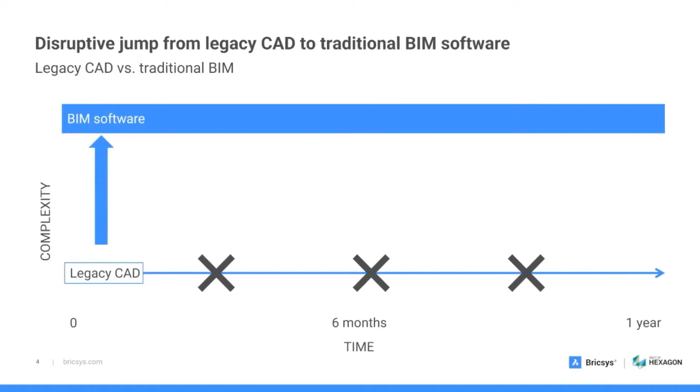Now, at Bricsys, we have quite a different approach to BIM compared to traditional BIM vendors. Let me explain that a bit more. Moving from CAD to a traditional BIM software is quite a disruptive process. BIM is a very different system than CAD, so it requires a full 100% conversion. All CAD licenses will have to be abandoned, but also all CAD data like template files and so on, built up by the users over many years, will all be lost. So they all have to be recreated manually in the BIM environment.

And since these traditional BIM software are very different from 2D CAD, it often takes 6 to 12 months to truly master it. So in the meantime, they lose productivity in the first 6 months while everyone is trying to make the transition.

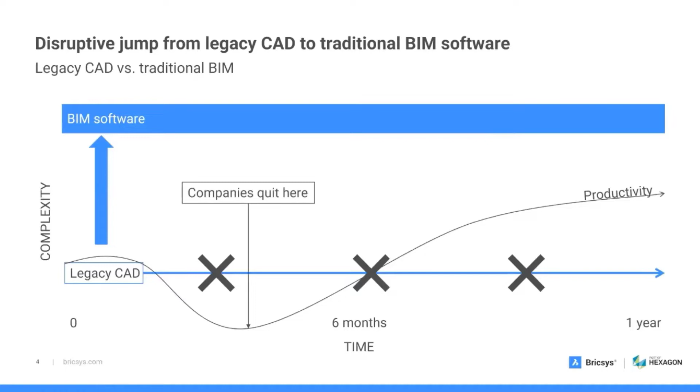And we often see that companies then quit in an early stage, but then all investment costs are lost, and then they fall back to CAD. And that's quite a shame, because as we will show later on in our demo together with Vrex, BIM workflows can really help to detect problems early in the design phase and avoid problems later on during the construction phase.

But then we have to offer those companies an easier transition to BIM so that they can do it at their own pace and without losing productivity during this transition. And that's what we do with BricsCAD. So in our BricsCAD portfolio, 2D, 3D, and BIM are in the same CAD system and can be used together. So you can reuse all your CAD data and avoid this drop in productivity.

And companies can then gradually make the transition from 2D to 3D and BIM and more advanced workflows based on that, so at their own pace. So you get more productivity step by step without having this disruption to your productivity.

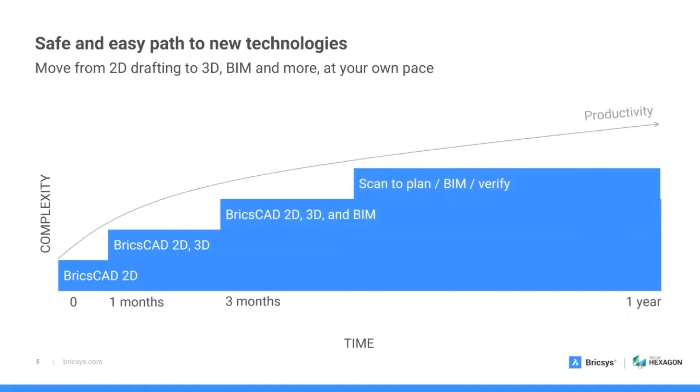Now, a full overview of what BricsCAD BIM is capable of would, of course, take us way too far. So I would like to focus on how we approach design, coordination, and openBIM. Now, openBIM and vendor-neutral collaboration have been at the center of the BricsCAD philosophy from the very beginning. So Bricsys, as you might know, is a founding member of ODA, which is the Open Design Alliance, which has enabled the use of this industry standard DWG file format across different authoring tools.

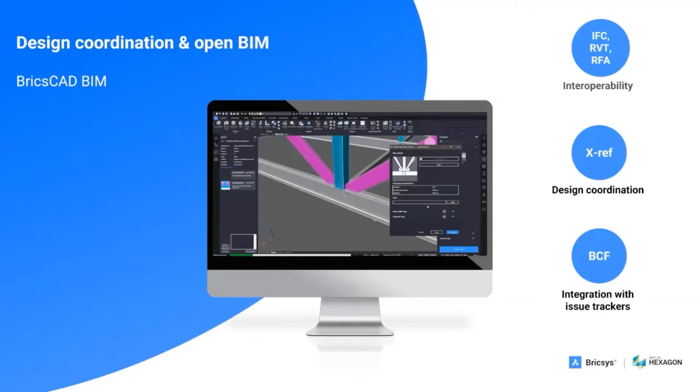But on top of that, we also offer IFC import export, we offer RVT import, RFA import, we also natively support BCF. And we have implemented openBIM quite differently than many other tools. So here are openBIM design principles that we've used while implementing openBIM. So first of all, we align our design workflow to the openBIM principles from the very start. So for us, IFC is more than just this export that you do at the end. Our internal data and classification structure is fully aligned to the IFC structure from the very beginning when you start modeling in BricsCAD BIM.

Some still see IFC as this static format for archiving or referencing projects, but we see IFC really as a building model exchange standard. So you should be able to work with IFC models the way you work with natively created models. We automate as much as possible, so openBIM should not be a hassle. And with our AI machine learning tools, you can automatically classify your building elements according to the IFC classification structure. And finally, we offer natively this BCF support. So we have a built-in BCF panel.

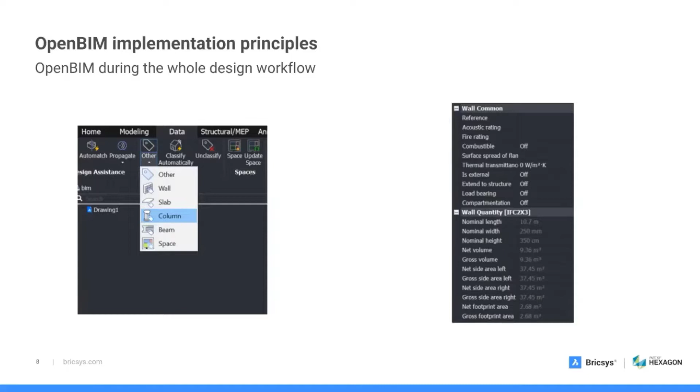So our whole internal classification is fully based on the IFC classification. So when classifying an entity while modeling, it is already according to the IFC specification, and also all of the properties of IFC and the quantities are already there available during the whole design process. So you don't need to worry about mapping or anything. So what you see in BricsCAD is what you get in IFC.

So again, IFC is still often used just as a reference or for coordination, like an architecture model that is used as a reference for an MEP model or for clash detection and so on. But we want to make it possible to use IFC for design transfer as well. And we make that possible with our IFC import. So when importing an IFC model, all elements are imported as native BricsCAD BIM entities, which has, of course, many advantages. So you can just continue designing, adding data, using all the automation tools that are available in BricsCAD BIM, generate construction documentation, and so on.

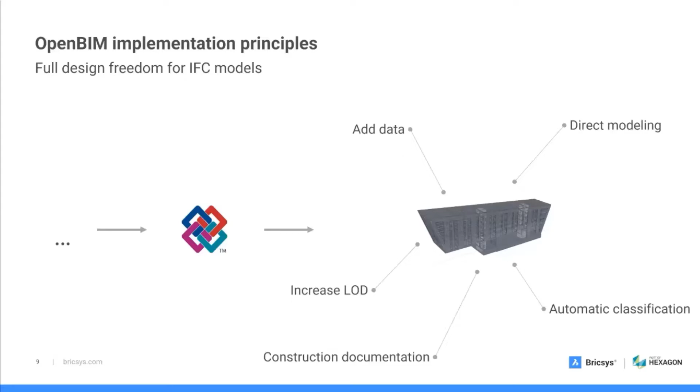BCF, as most of you know, is the openBIM format for exchanging issues and communicating with other project team members. Now we offer BCF support built in, so we have a BCF panel inside BricsCAD BIM, in which you can read BCF files, but also directly connect with the API to cloud BCF services like BIMsync, BIMtrack, BIMcollab, without needing to install any plugins for these specific platforms.

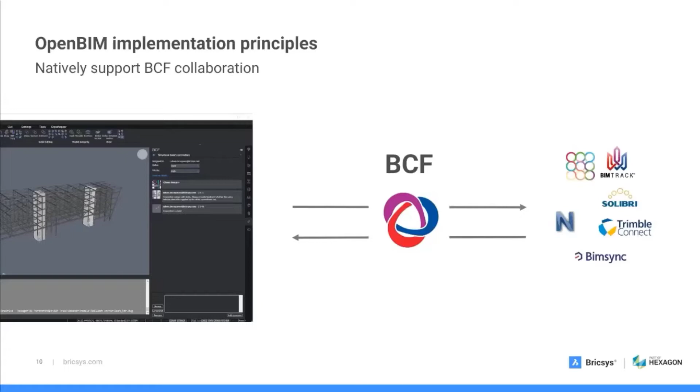Now, our focus on openBIM is paying off, and today you will clearly see that in the demo later on, where we show the integration with Vrex. The whole workflow is fully based on openBIM, so we use IFC and BCF standards to integrate with the Vrex Virtual Reality platform. So the model that was created in BricsCAD BIM just gets exported easily to IFC and imported

in Vrex. And then in Vrex, you can create BCF issues and either transfer them to BricsCAD as a BCF file and open them in the BCF panel, or you can use the BCF API and connect to one of the BCF services like BIMtrack, BIMcollab, and so on. So here you really see that investing in this openBIM support pays off to easily integrate with a tool

like Vrex. Okay, I will now pass over to Rune and Chris from Vrex.

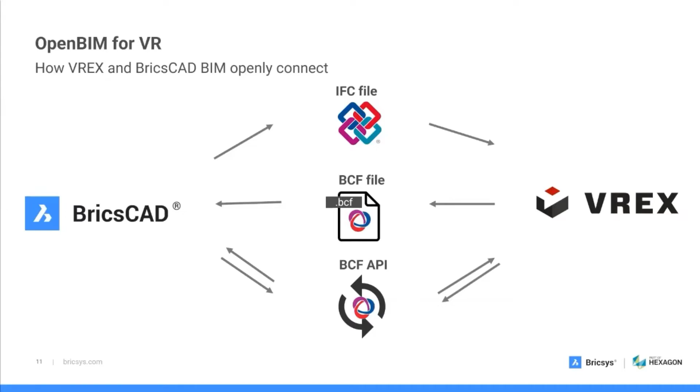Before we head over to VR, we want to give you a bit of background information about Vrex. Vrex is used throughout the world and is supported in multiple languages. Our headquarters is in Norway, and we have partners throughout the world to support our customers. Our customers range from building owners, designers, consulting teams, as well as contractors. Vrex is used on projects of all sizes and all types. This includes commercial, government, and industrial sectors of the construction industry.

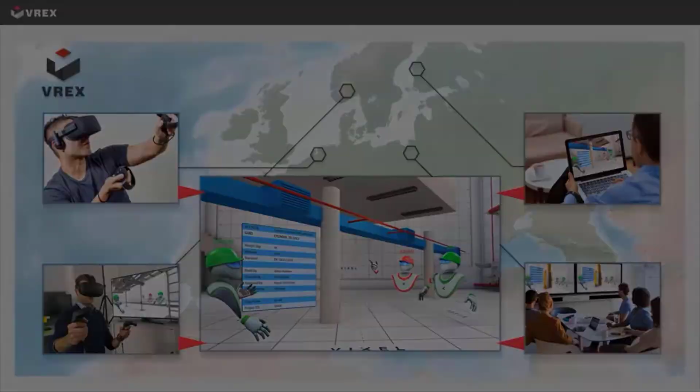Our core mission at Vrex is to allow all project stakeholders to step into the 3D model. Everyone can experience BIM together, live, and at the same time. They can do this either in VR or by watching on our desktop viewer on their computers. Vrex enables you to resolve complex issues as a team and prevent costly rework downstream. Using the IFC and BCF, or BIM Collaboration Format, buildingSMART and openBIM have enabled Vrex and BricsCAD to seamlessly exchange models and issues together.

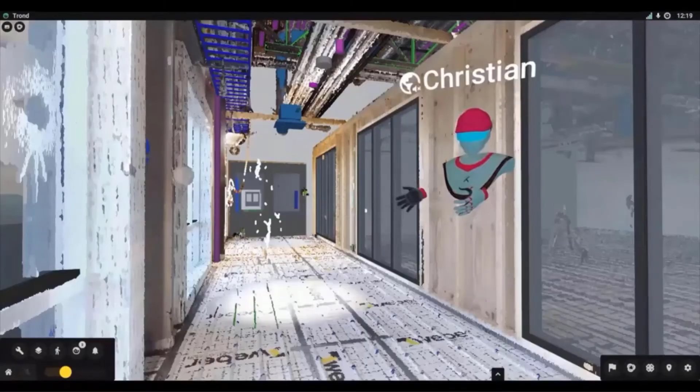In addition to BIM, laser scanning and reviewing point clouds for as-built conditions is becoming common practice on projects. Vrex allows stakeholders that can't go out to the job site to overlay and visualize point cloud scans together with BIM in a life-size environment. Alright, so now Rune and I are going to put on our VR headsets and do a live demonstration of Vrex. We're going to be reviewing the project at the same time, but Rune is going to be in Norway and I am in the United States.

All right, so Rune, we're both here in VR. Would you mind coming over onto this side? I want to show you something here related to this cantilever. This side of the building is cantilevering over with no underlying support, so I want to take a look at the structural for this. Yep, exactly, that spot right there. So I'm going to turn off the architectural.

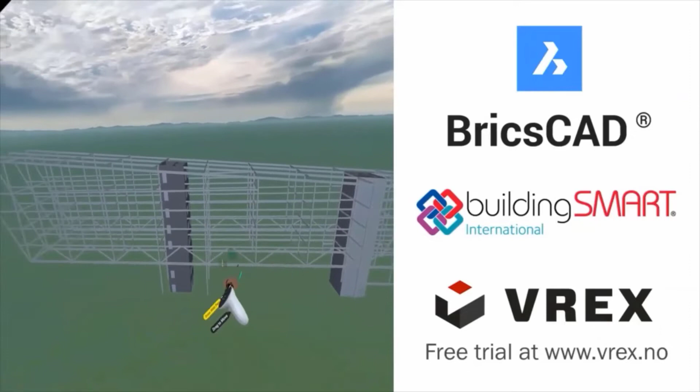And now we're looking at the structural, and I can see that there's a truss system here that the engineer has done. Let me go to red lines. We need to talk with the engineer and then the construction team about how they're going to fabricate and splice those trusses. I feel like we're going to need to do construction in this direction here, so that way we have a lot of the back span structural steel in place.

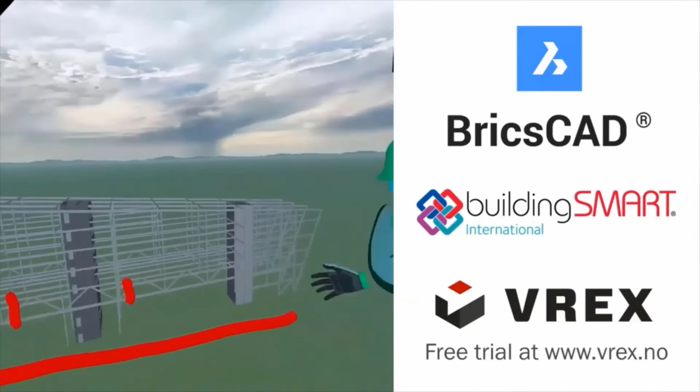And then we need to figure out where the trusses are going to be spliced, and where we're going to have our cranes. We'll need to talk about what sort of space there is on site for crawler cranes versus tower cranes. Then we'll need to evaluate the pick for the cranes, and see if we need two cranes to lift the truss pieces or not. And then look at how that core is going to be done in the middle there.

So let me take a picture. And then I'll schedule a meeting with the construction team so we can take a look at this and talk about it a little further. Now let's just clear out the red lines. Turn the model back on. I'm going to go into one-to-one mode here, or full life-size mode.

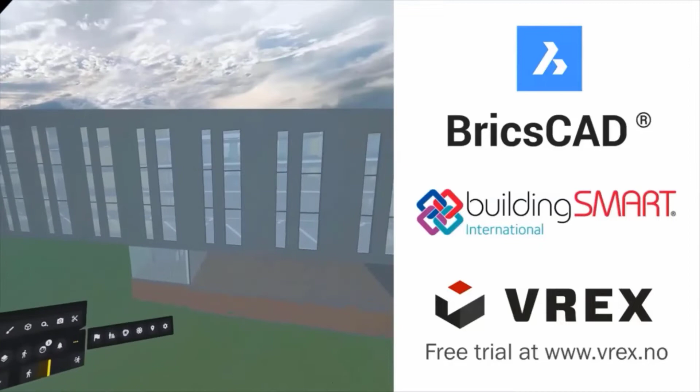Yep, I see you there.

All right, so now what I'm going to do is explain building sections using clipping. What's great about this is if I just click on a surface here on the building, and then I'm going to navigate forward so we can get a little bit closer. Essentially, if I hold down the trigger and move this clipping plane, I basically have a 3D building section of my project.

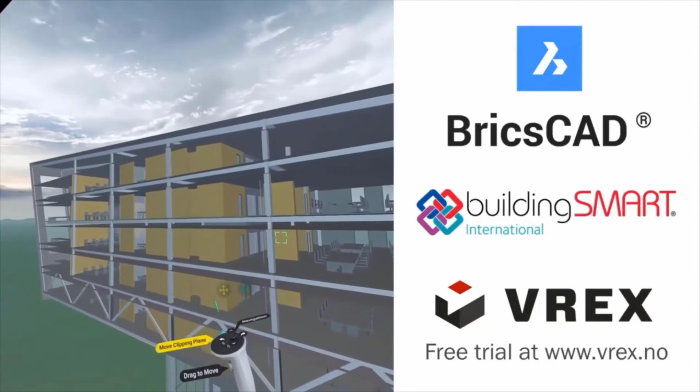You'll see on architectural drawings oftentimes building sections cut at different locations to try to give you a map of the interior of the building. Here in VR, this is just accentuated to another level. I can really see how each of the building systems work from floor to floor, especially if I had the MEP in here and looking at MEP shafts and where things transfer from floor to floor.

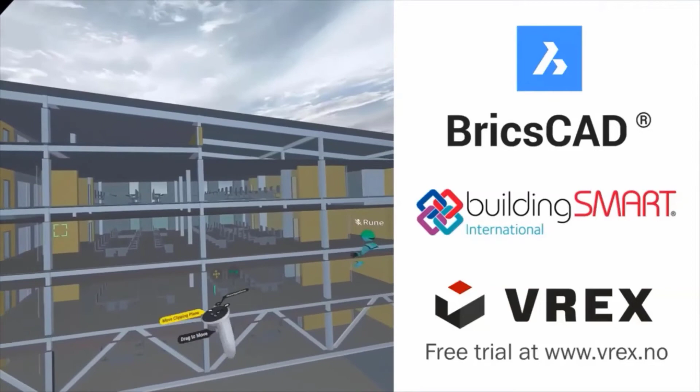I can see the consistency and layout from one area to another. I can see how the structural fits in the ceiling space. So really it just takes building sections to another level. I'm going to go ahead and remove the clipping plane.

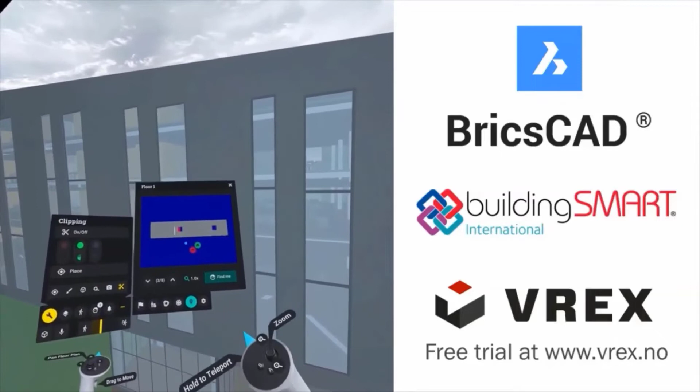And then what we can also do is go to floor plans here. This is another way for us to navigate. You can see where Rune and I are with our icons in the site plan, and we can just go floor to floor. Let's say here on floor number 3, I'll just click us into the building.

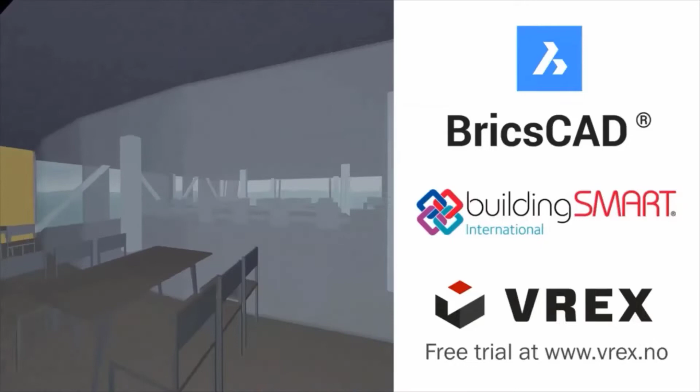Okay, so now we're teleported onto the 3rd floor, and we're life size. Essentially I can get a full feel and experience the model, and I can actually just walk over here. First thing I want to look at is how this structural is lined up with the architectural space. This feels a bit tight to me, and from a headroom clearance and safety point of view, I just want to make sure the architect and the owner are good with this.

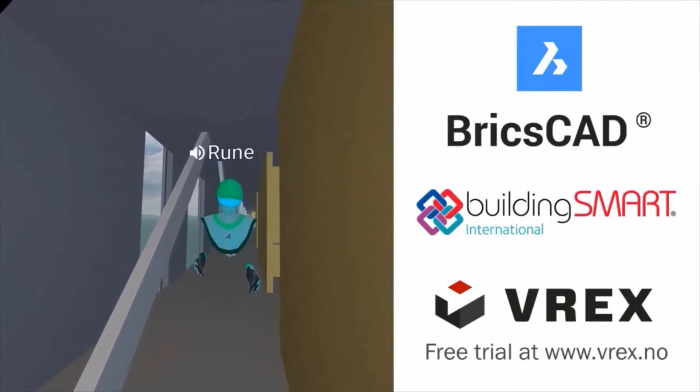I'm going to go ahead and walk through here. So Rune, does this look a bit tight right here? Do I look tight in this space when I'm walking through it? Yeah, it looks like you're walking through a slightly narrow door. Okay. Would you mind taking a measurement of that real quick? And then let's just...

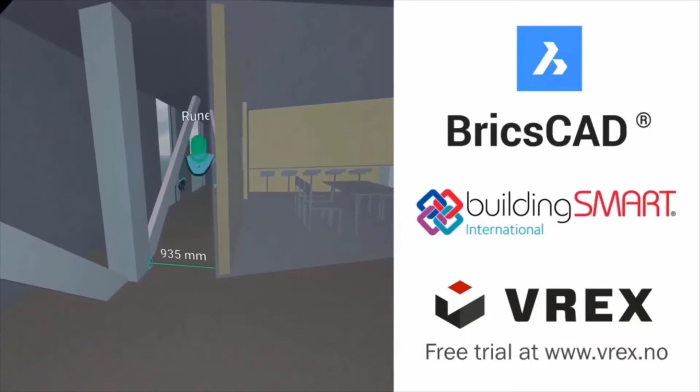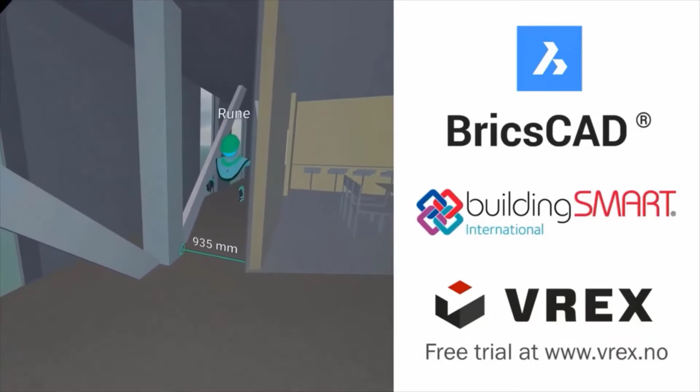Okay, so it's a little bit under a meter there from the clear face on the wall. I just want to talk with the owner and the architect. We'll get on a session with them and review this, and maybe we'll make an issue out of this later to verify.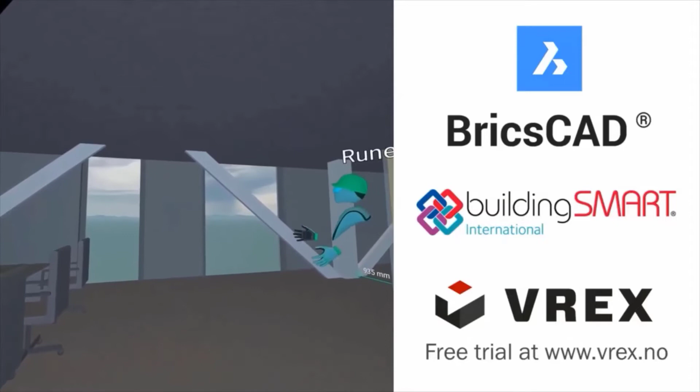This is a really good example on this level here. Just walking over to the middle of the space so I can get a feel for it. This level is a bit unique because we've got these truss web members or bracing members. I'm looking at how this affects, yeah, exactly where you were pointing there, how that impacts the visibility out the windows.

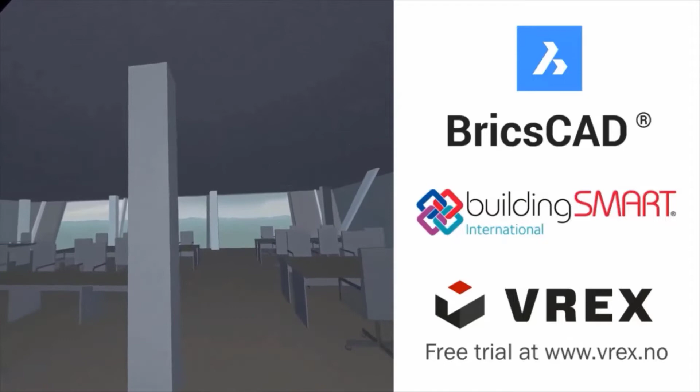I'm also looking at the column placement here relative to the window panels, and making sure that's all nice and symmetrical between the window manufacturer and the structural, so that aesthetically it looks good. So it'll probably be good to bring the architect and the engineer into this space and make sure that everything from a visibility point of view and safety protocol is all good.

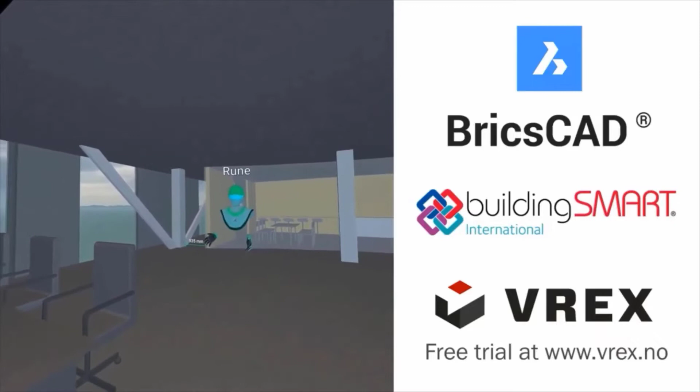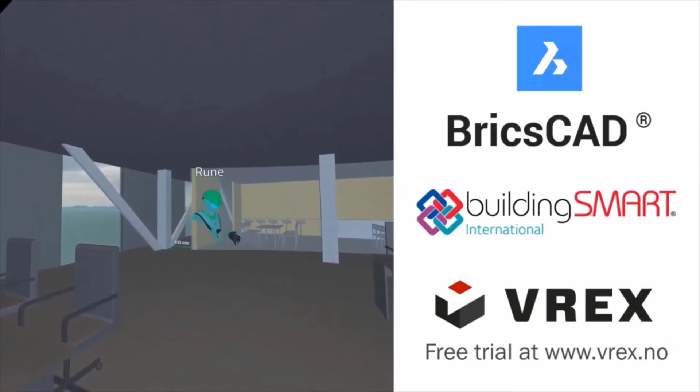You said you had some issues down in the basement related to MEP that you wanted to show me. Do you mind taking us down there? Yeah, I'll open that up. Yeah, so I want to go over a couple of issues down here. Okay. One of them is the water pipes. Looks like they're trying to turn to avoid the ventilation, but they're turning a bit too early. So I want to make a note of that and bring that back to the modelers.

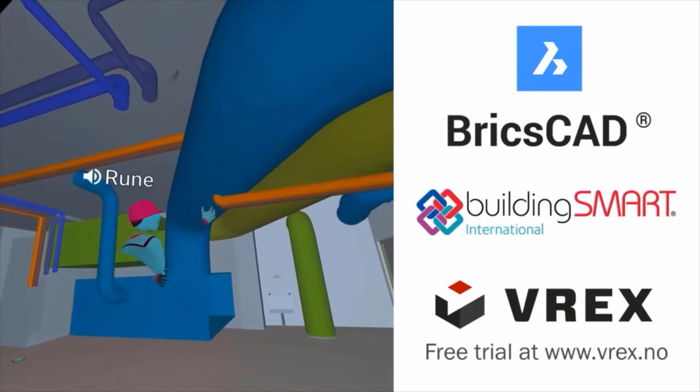So if you instead go over like this and go up there. Oh yeah, I can see the clear clash. Fine. Yep, okay. So I'll just take a picture of that.

The second issue I want to look at is the ventilation in front of the door. I know this room will double as a storage room for maintenance, and there's some big equipment going in here. It looks like it's going to be a bit tight getting past that door.

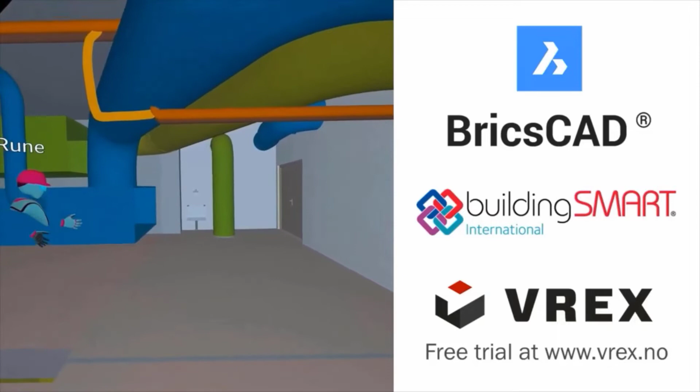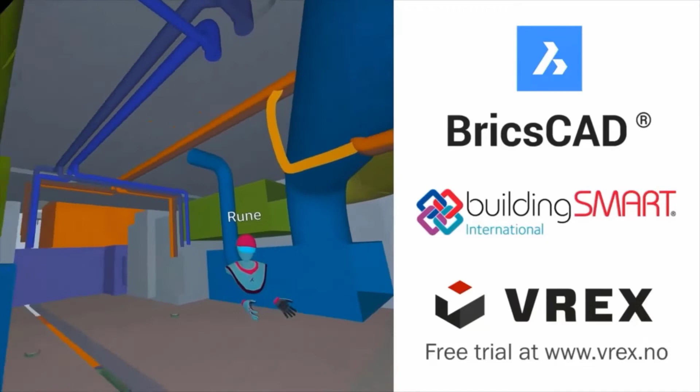The dimensions really help us quickly see that there's a potential access issue there. When we're down here like this, you can see this, of course, but looking at the BIM model on your computer screen, you can have soft clash areas and reservations around equipment.

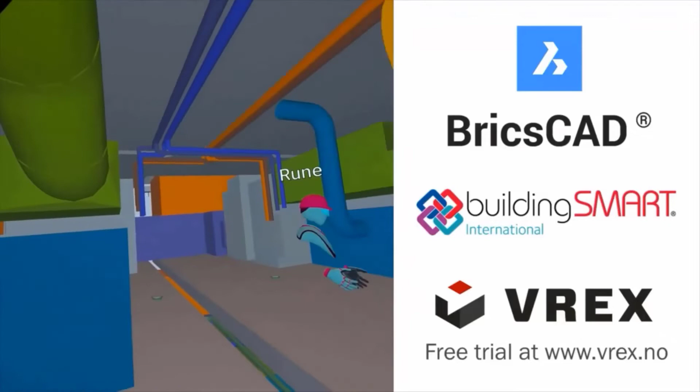Acting like I'm actually the maintenance person, putting in all the equipment and being able to feel it life size with everything in here, I can see all sorts of access issues, especially from a maintenance point of view. Once facilities actually start operating, this is just really powerful.

So I'll just make a red line of this, suggesting to move this slightly back. Make a picture of that.

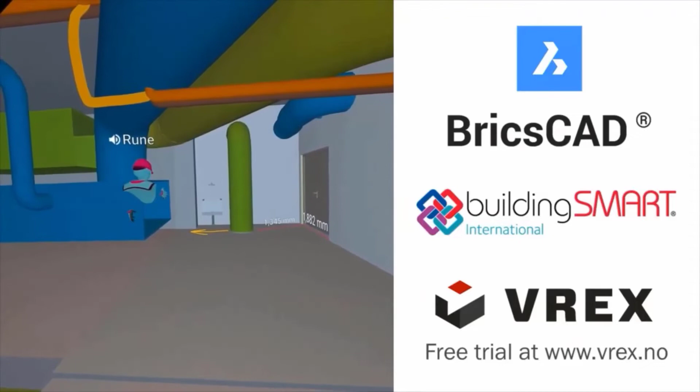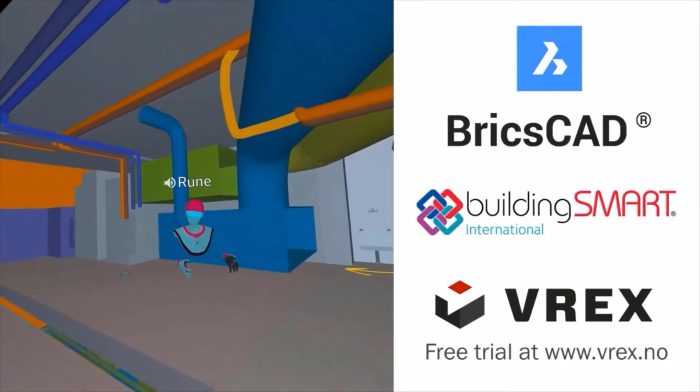I think that gives a pretty good overview of what Vrex and Virtual Reality does, allowing us and multiple project stakeholders to collaborate at the same time. You're in Norway, I'm in the US, and right now we're live here in what is as close to being the real building as possible. It's pretty amazing.

Now we're going to show you a live workflow between both BricsCAD and Vrex using openBIM. Let's dive in and see how this workflow looks.

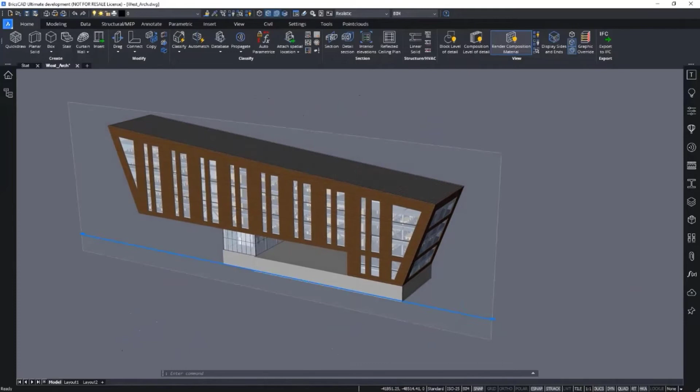We start in BricsCAD BIM. Here we have our office building. There are two models in here, the architectural model and the structural model, added as an XREF.

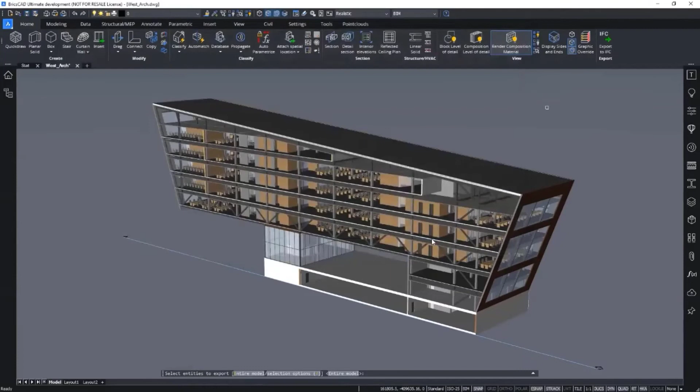Okay, we export to IFC, and in this case we will take IFC 2x3. We save, and then we go to Vrex.

The first thing you do is go to the Vrex admin website, then choose to upload your models. Then you add the files that you exported from BricsCAD. Once uploaded, they are processed and automatically available for a virtual reality meeting.

Then you go over to the virtual reality meeting application. You open that up, search for your project, and open that project. You type your name, set your audio settings, and then enter into VR.

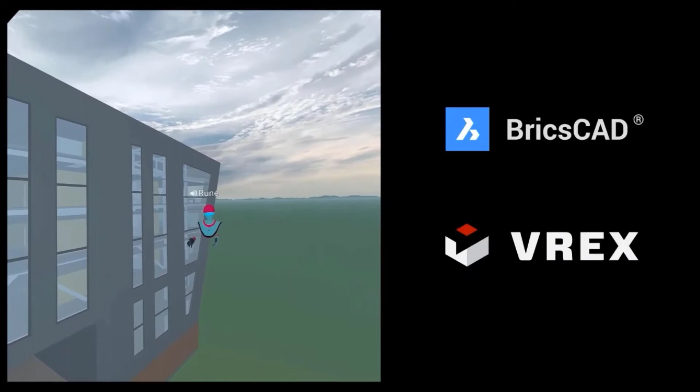Here you see me and Chris decided to meet inside a model. We will go to an area where we think there are some problems in the model. So we are walking through the model together until we locate something that is problematic.

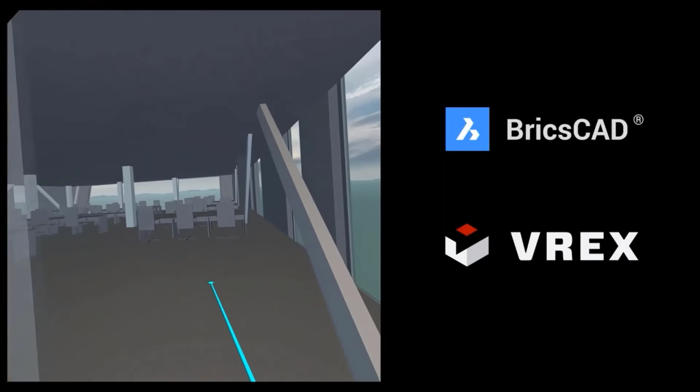In this case, it seems like the column and the wall are slightly narrow for walking through. We decide to make a measurement there to check the width, and it's less than a meter. So Chris decides to make an issue out of this and opens up the issue creation guide.

This is made so that anyone should be able to make an issue, even if they don't know what a BCF is. He takes a picture, then highlights the objects related to that issue. Having those objects attached to the issue makes it very easy when you get back into BricsCAD to see which objects are related to that issue.

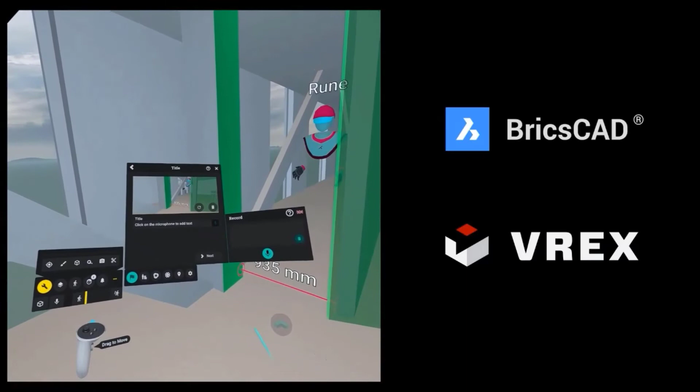Using voice to text, he gives the issue a title, then adds a description to it. Status and type are fine as they are. And then it saves that.

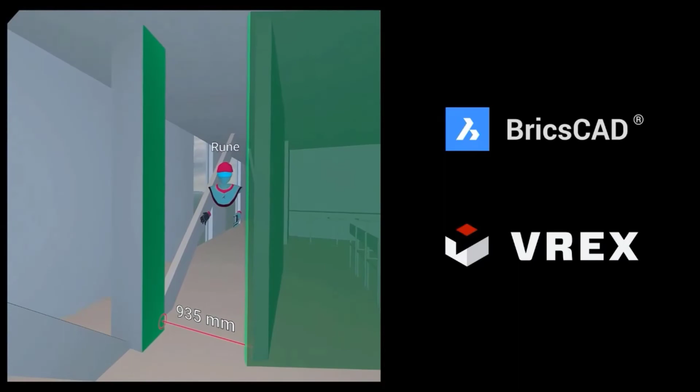Then that's ready to be taken back into BricsCAD. So now we are back in BricsCAD BIM. We go to our built-in BCF panel, where we open the BCF file that was sent to us. There is one issue in it, and we can see all its details and the description.

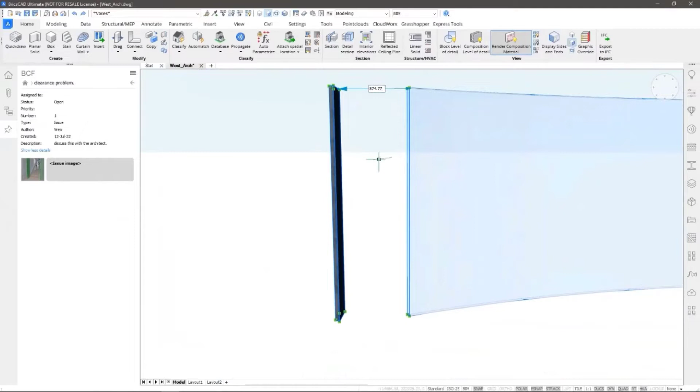We can click on the screenshot, so it takes us immediately to the exact location in the model where the issue occurs, and shows the relevant entities. We see here as well that the distance is too small, so we need to adapt this.

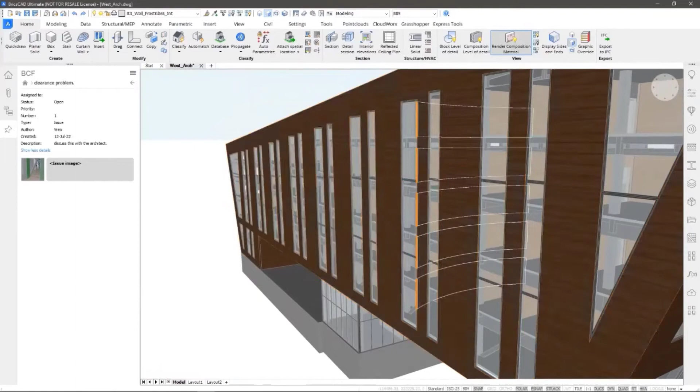We'll start with making these curved interior walls smaller. But of course this issue does not only occur on this lower floor, but also on the floors above. So we let BricsCAD automatically detect the other walls that have an aligned face, so we can apply the change on all floors at once. And then we push-pull to make it smaller.

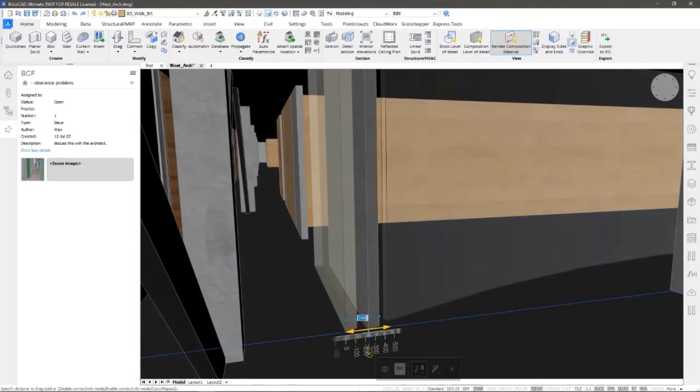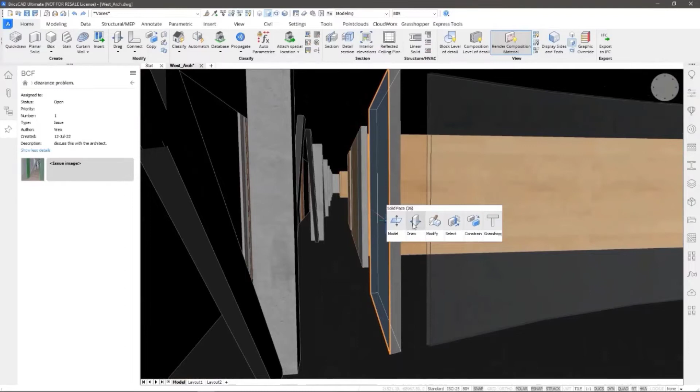Now we have to move these interior walls to the right. But here again, there are many walls that have the same limited distance to the structural members. So let's search for all aligned walls again and move them all at once. Now by default, when dragging the walls, the connectivity with other walls is not kept, as you can see. But we can toggle the connectivity mode on, and this way the connection with other walls is kept.

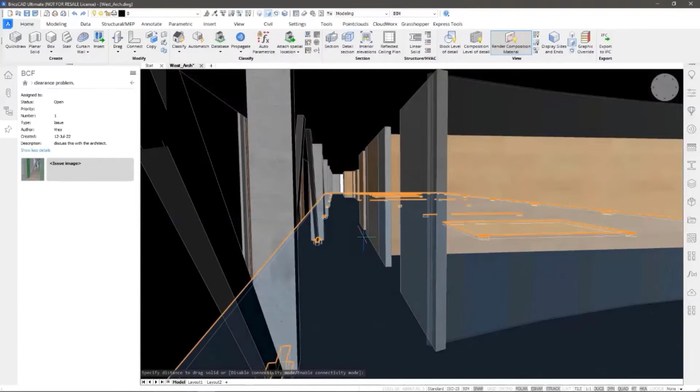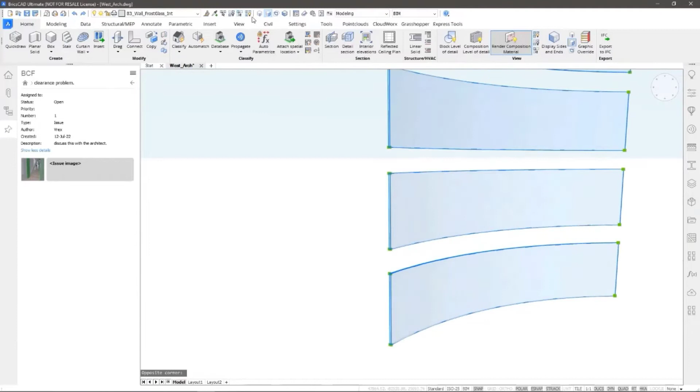So here all connections are kept with the other walls. Now we see that the curved walls are still a bit too big, so we will slice them. We will do it for all floors at once.

So we select this face of the other interior wall as a slicing plane and remove all the parts that were sliced.

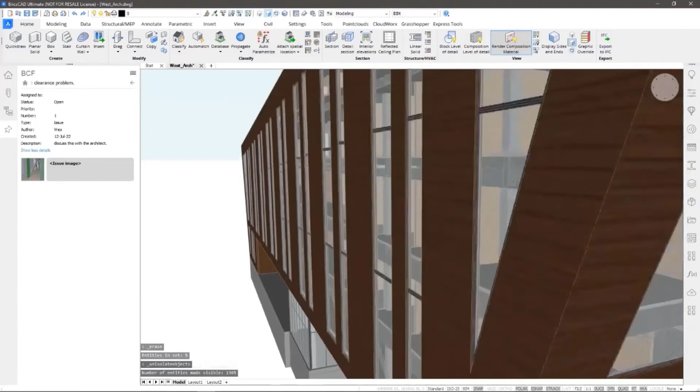And so now if we measure again by simply selecting the entities, we see that now there is enough space, so this issue is resolved.

Apart from the workflow with a BCF file, you can also connect to BCF cloud services like BIM Track, and that from within the same BCF panel.

So we log in, and then we see all our projects, and in the project we can see all the issues. Here again, when clicking on the issue, we see all details like due date, description, and so on. And we can easily navigate to the location.

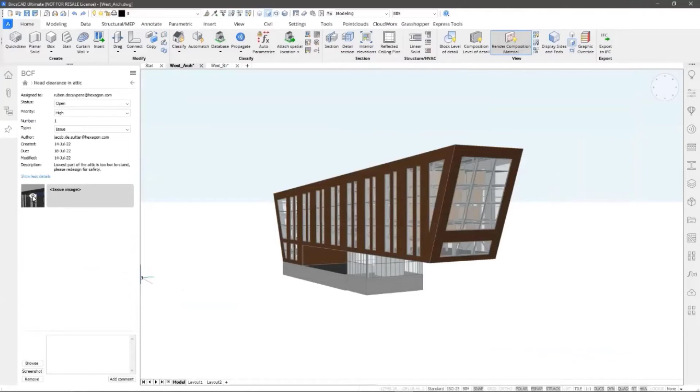And we can indeed see here that the height is too limited to stand. So we'll have to move this wall.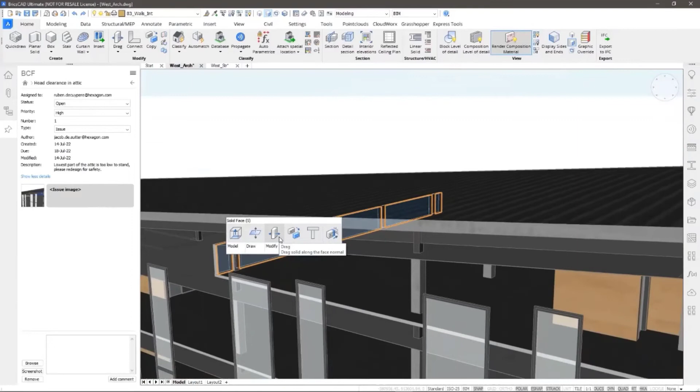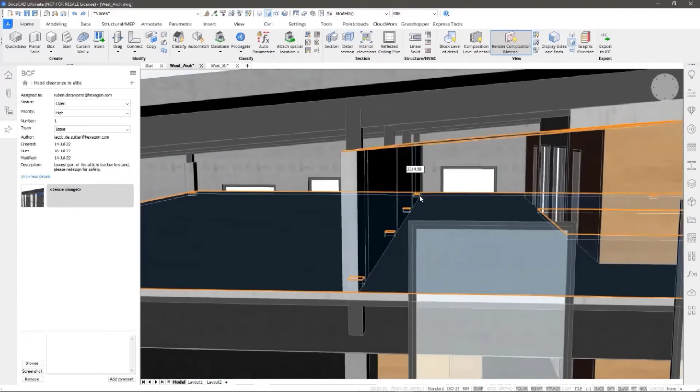But when moving the wall, we can again choose to only move the wall or to also keep the connection with, in this case, the ceiling. We'll move the wall to the next row of columns. And by selecting the floor and ceiling, we immediately see that there is enough head clearance now.

So we can add a comment to the issue describing that we made the changes so that this issue can be resolved. We add a screenshot and add the comment to the issue.

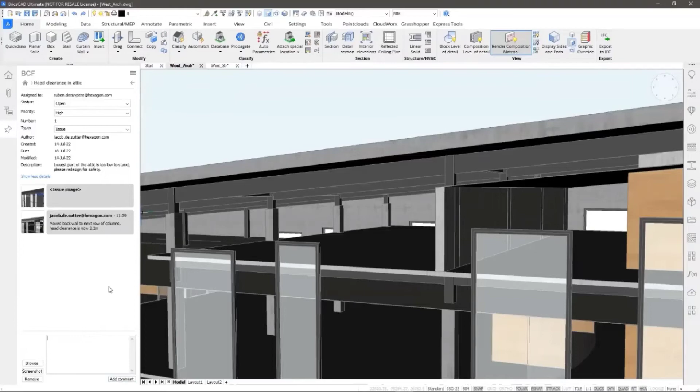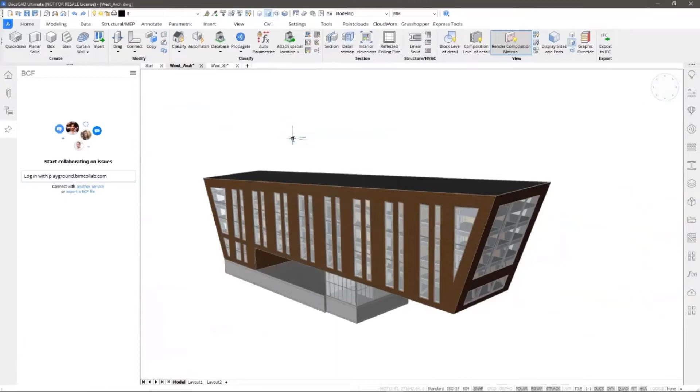Now we will switch to another cloud BCF service, BIMcollab. So we simply log in by providing the URL of BIMcollab. And once we are logged in, we can see all projects and the issues in it.

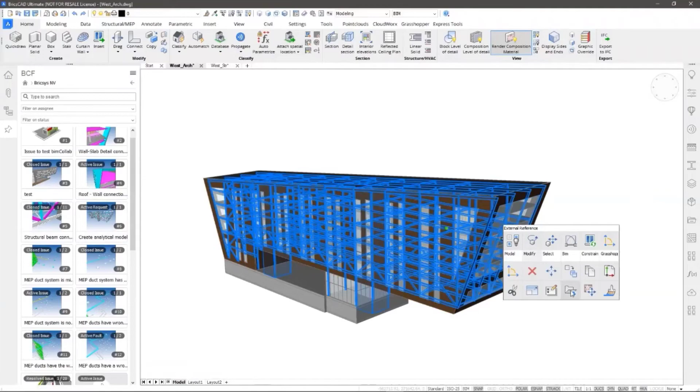We will now resolve an issue related to the structural model. As you can see, the structural model is an external reference in the model. So we open the XREF and we can see that the details, though, are not very detailed, the connections.

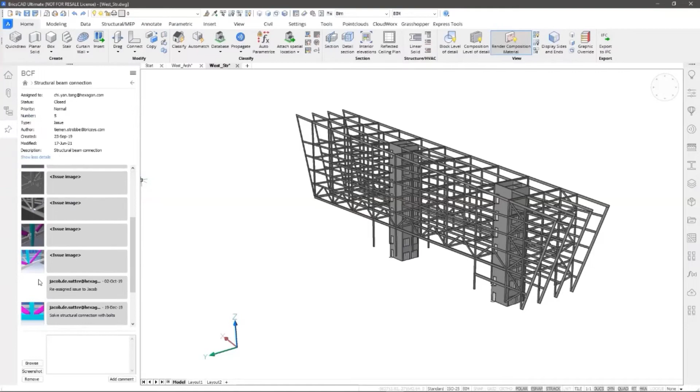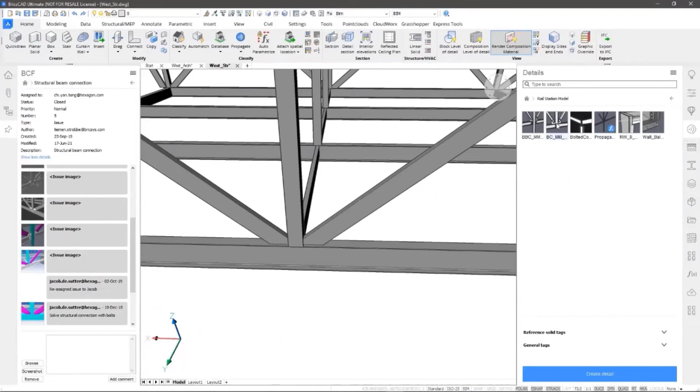Now there is an issue requesting us to solve the structural connections with bolts. To do that, we will go to our details library and look for the right connection detail that we could apply.

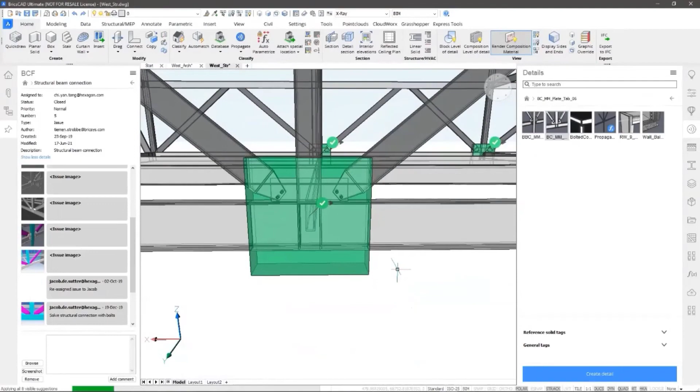Now, of course, there are many places within the model where this detail could be applied. So we use the propagate functionality to automatically scan the model and search for similar connections. And it finds 8 locations where this detail can be applied. So now on all eight locations this detail is applied.

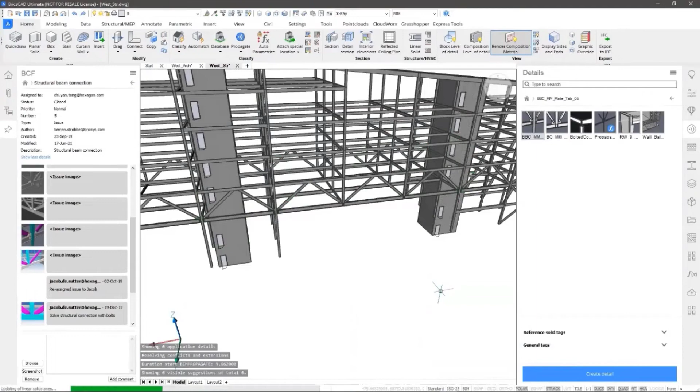For the connections where the column runs to the ground, we need to apply another detail. But again, we use propagate to find all relevant locations within the model. In this case, there are 6. And so we have now increased the LOD of the model by automatically applying the detailed connections to the model.

Okay, that's it for the demo. Back to you, Ra.